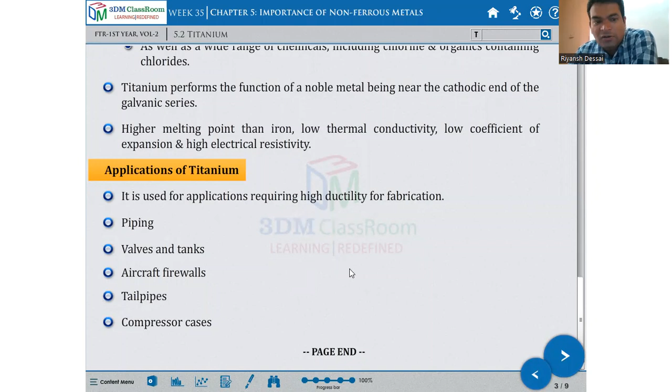Application of titanium used for applications requiring high ductility for fabrication such as piping, valves and tanks, aircraft firewalls, tailpipes, and compressor cases. These are the different uses of titanium.

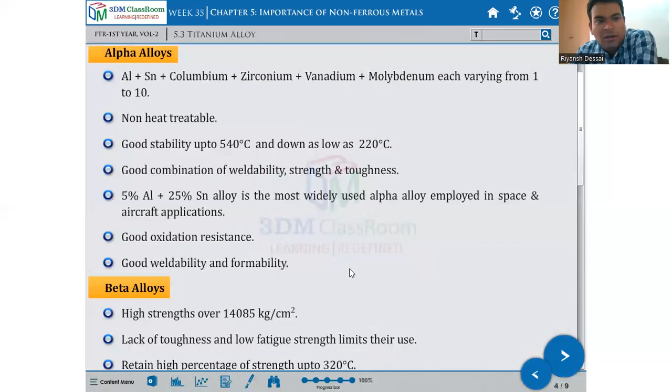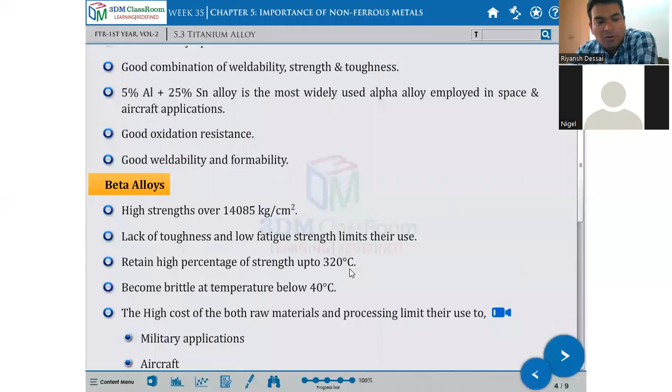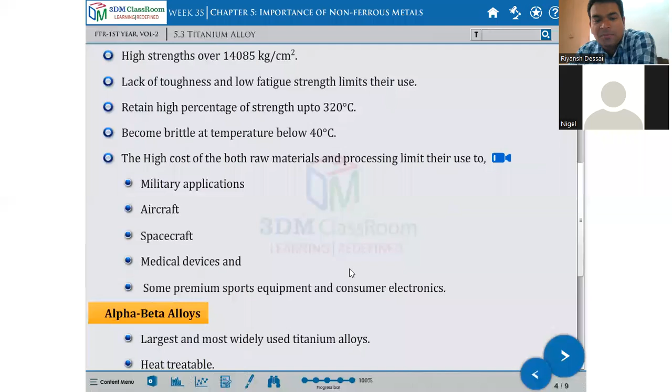Titanium alloys, we studied alpha alloy and beta alloy. Just remember the uses: good oxidation resistance and good weldability is alpha alloy. Beta alloy has high strength, but its lack of toughness and low fatigue strength limit their uses. It retains a high percentage of strength up to 320 degrees centigrade, but becomes brittle at temperatures below 40 degrees centigrade. The high cost of both raw material and processing limit their use to military applications, aircraft, spacecraft, medical devices, and some premium sports equipment and consumer electronics.

Alpha-beta alloys are the largest and most widely used titanium alloy. It is heat treatable and useful up to 430 degrees centigrade.

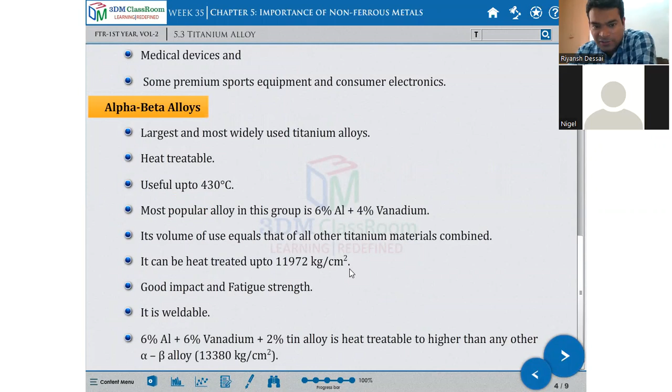Yesterday I covered this. No need, just remember certain things. Then zirconium, we also finished.

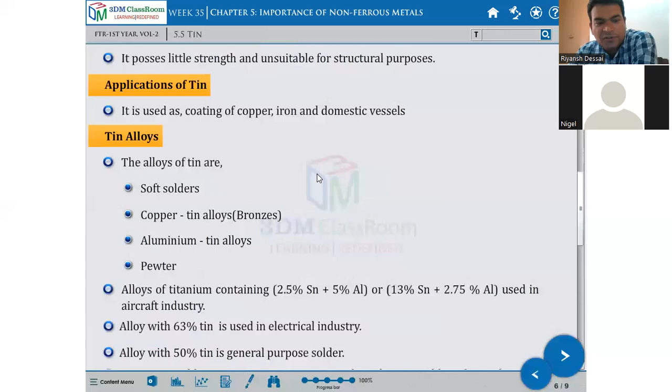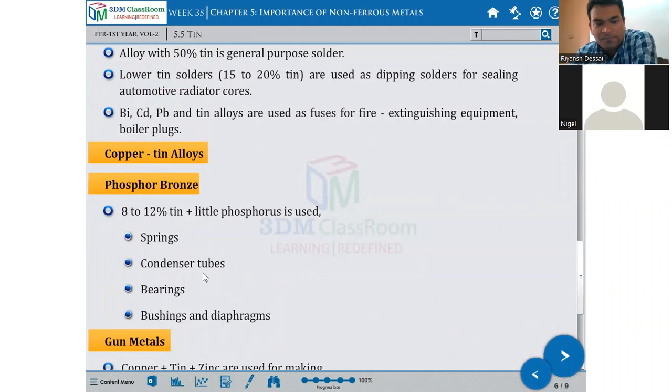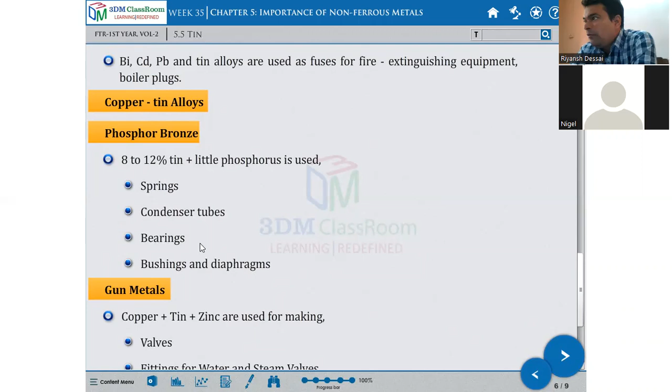Tin we also discussed yesterday. Gunmetal, so the alloy of tin that is phosphor bronze, has 8 to 12% tin and a little phosphorus. It is used to make springs, condenser tubes, bearings, bushings and diaphragms. This diaphragm is used mostly in valves - diaphragm operated valves, plungers and such have a diaphragm. This diaphragm is made of phosphor bronze. Bushings and all friction bearings are also made of this.

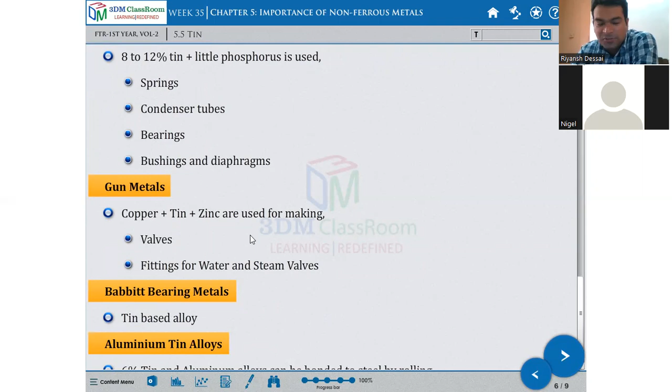Gunmetal is copper, tin, and zinc. It is a mixture of copper, tin, and zinc, and is used for making valves, all the gun brass adjustable valves are made of gunmetal, fittings for water and steam valves. Babbitt bearing metal is a tin-based alloy. Aluminum-tin alloys with 6% tin and aluminum can be bonded to steel by rolling.

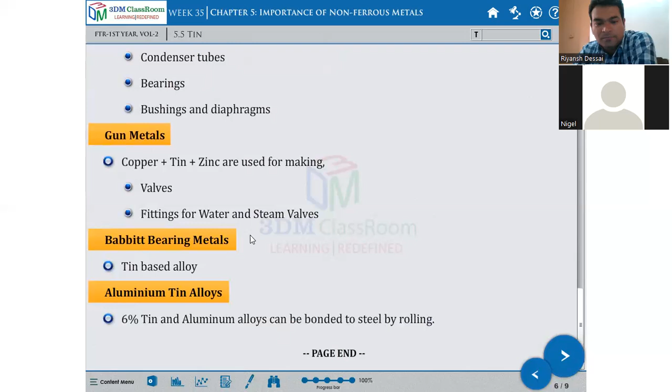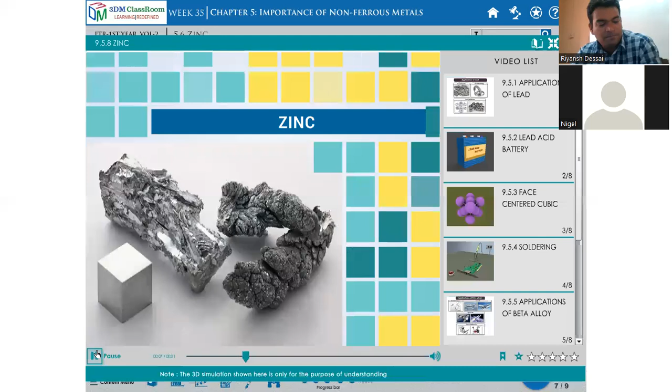Zinc is bluish white in color. It is the fourth metal most utilized in industry, coming after iron, aluminum, and copper. It has general purpose use in industry, for example galvanized pipes, galvanized sheets. It has a low melting point. Most zinc is used for making galvanized products, fuel pumps, and automobile parts.

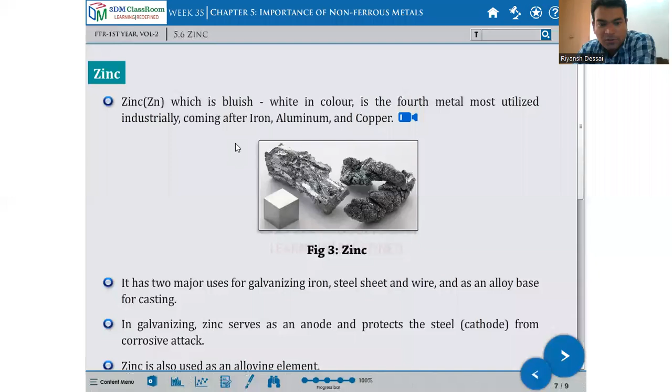So zinc is bluish white in color and is the fourth metal most utilized industrially, coming after iron, aluminum, and copper. It has two major uses: galvanizing iron, steel sheets, and wires, and as an alloy base for casting. In galvanizing, zinc serves as an anode and protects the steel cathode from corrosive attack. Zinc is also used as an alloying element, which is also a very important use of zinc.

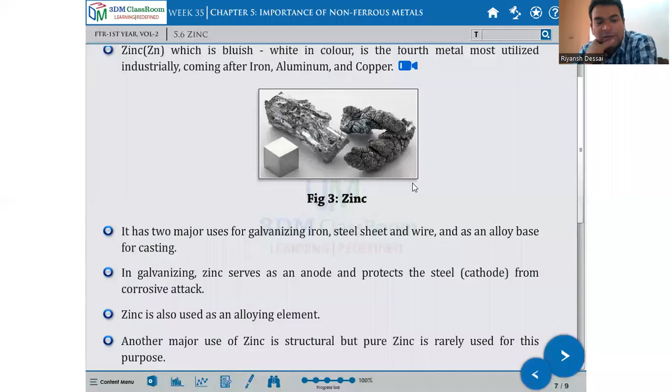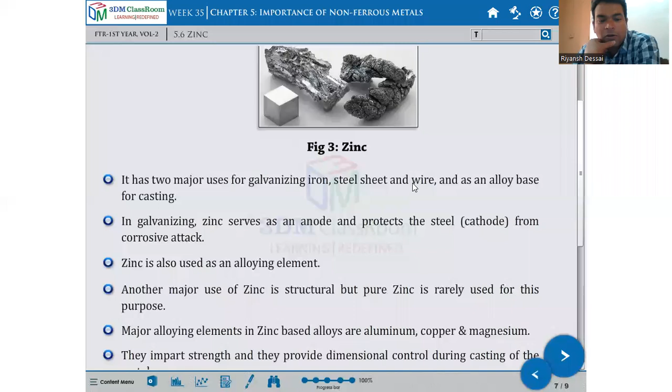Another major use of zinc is structural, but pure zinc is rarely used for this purpose. Major alloying elements in zinc-based alloys are aluminum, copper, and magnesium. They impart strength and provide dimensional control during the casting of the metal.

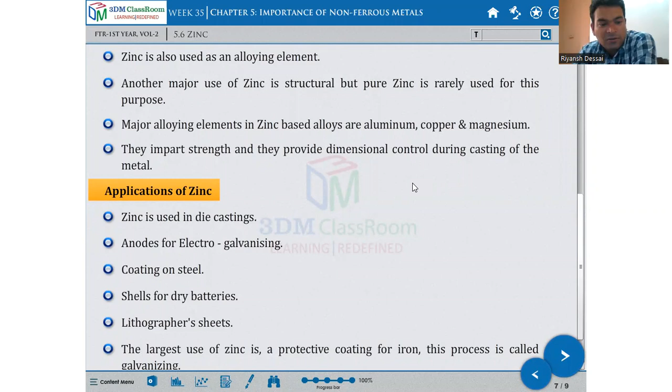Application of zinc: it is used in die casting, as anode for electrogalvanizing, coating on steel, shell for dry battery, and lithographer sheets. The largest use of zinc is as a protective coating for iron. This process is called galvanizing.

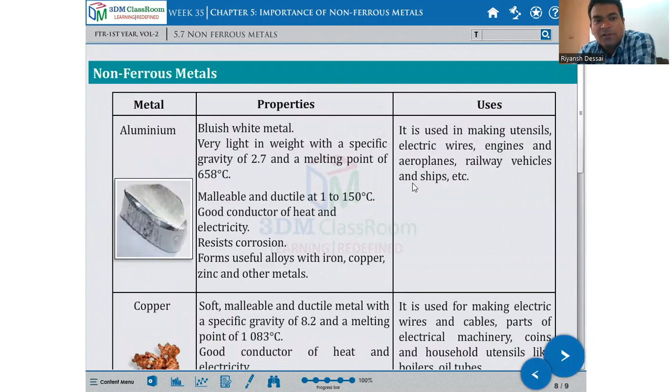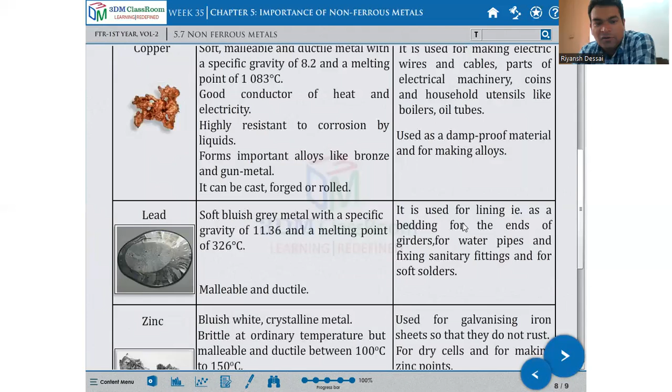What are the uses of zinc? Non-ferrous metals, another category - aluminum, copper, lead - are all mentioned here, and their properties and uses are given in this table. We already discussed this again and again, discussing the same thing. You will find this type of chart in your book and PDF book also.

Next is scrapers. Like your files, there are scraper tools as well. You will find these in your cupboard or tool display. Scrapers are also a cutting tool used for filing or machining purposes.

We use files for filing. Similarly, instead of a file, if you use a scraper and start removing metal, that process becomes scraping. But it removes much less metal compared to filing. Scraper is widely used for the most precise finishing of hard parts after other machining operations. It is a very manual process, requiring very high skill plus continuous effort - a scraping job takes a lot of effort to learn.

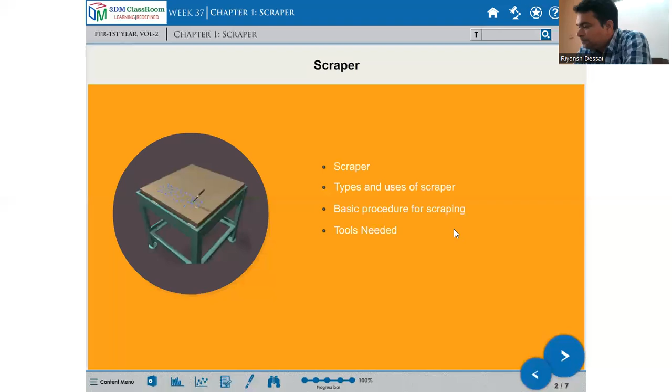So these are the scrapers. They are used as a scraper. This is the basic procedure of scraping and the tools needed.

Generally, scrapers are available like this - these are the scrapers, like a chisel or wooden chisel with a singular shape, but the bottom face has a circular shape, and using that bottom face we remove the metal. It is a specific type of operation of removing the convex spot from the machined surface, and the tool used for removing these convex spots is called a scraper.

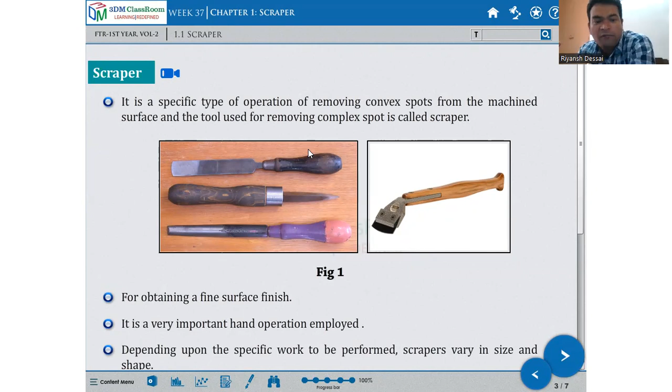For obtaining a fine surface finish, this is a very important hand operation. It is not done by machinery - it is done entirely manually. Depending upon the specific work to be performed, scrapers vary in size and shape.

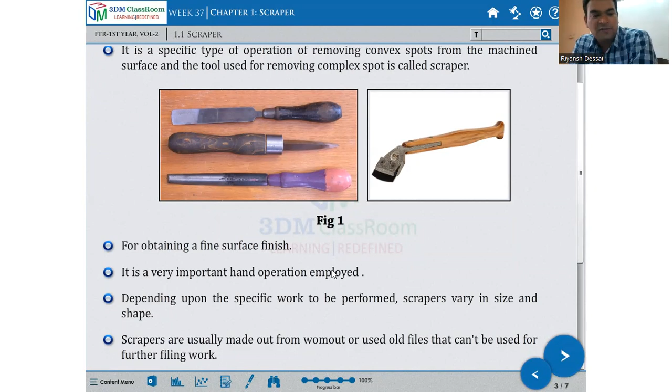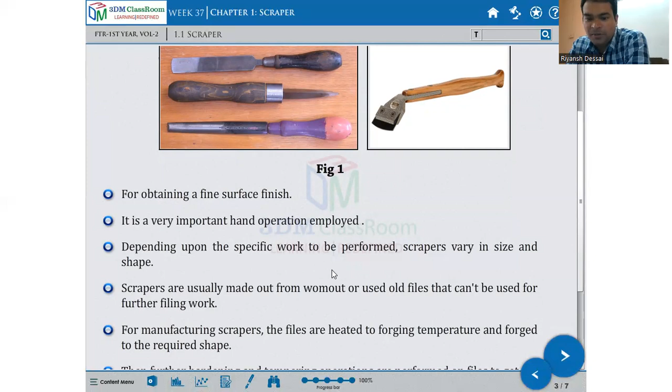Scrapers are usually made from worn out or used old files that can no longer be used for filing work. For manufacturing a scraper, the files are heated to a forging temperature and forged to the required shape. Further, hardening and tempering operations are performed on the files to get the desired hardness. The cutting edge of the scraper is ground to sharpen it.